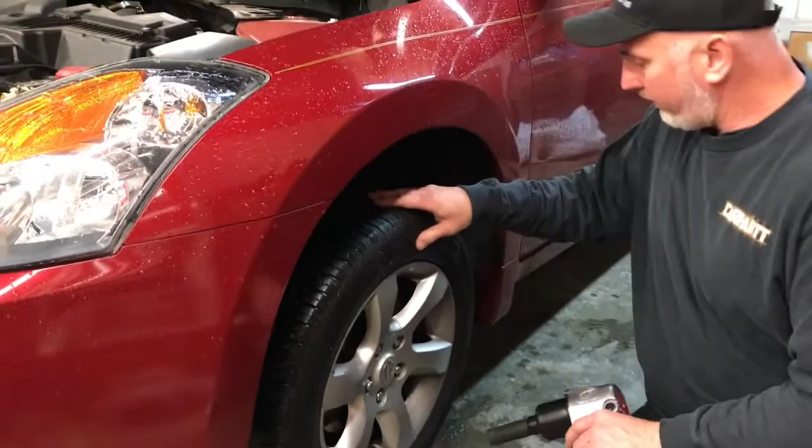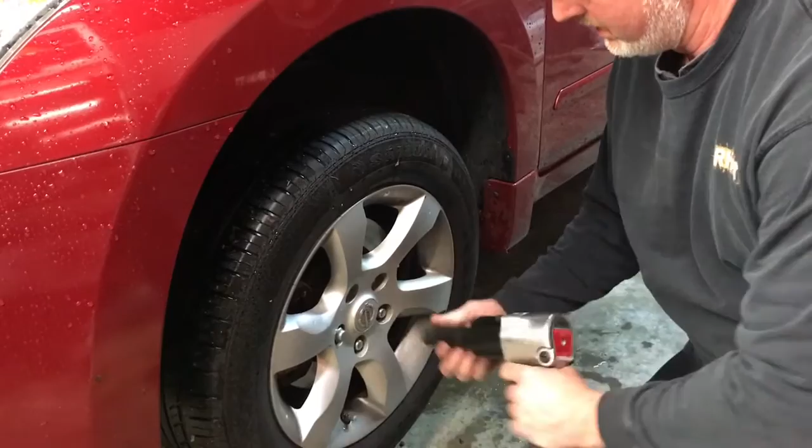I'm going to use my 1/2-inch drive impact wrench, and we're going to pull all of the wheels off. Okay friends, now we've already got all the lug nuts off of the vehicle.

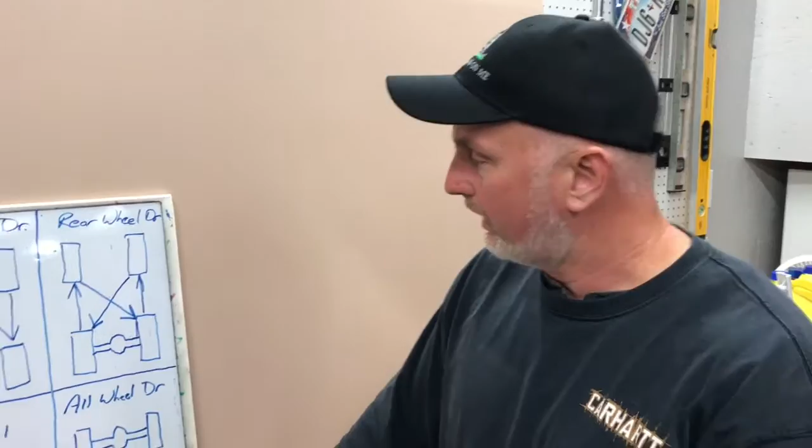I want to talk about how to rotate the tires, because there's a couple different patterns depending on what kind of vehicle you have, and hopefully my little diagram here will explain it to you. Now back in the old days, when I first got in this business, we were always taught that you always rotated tires from front to rear no matter what.

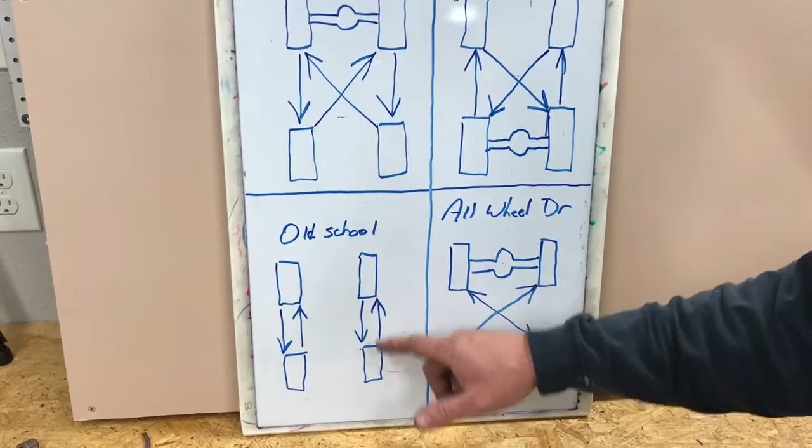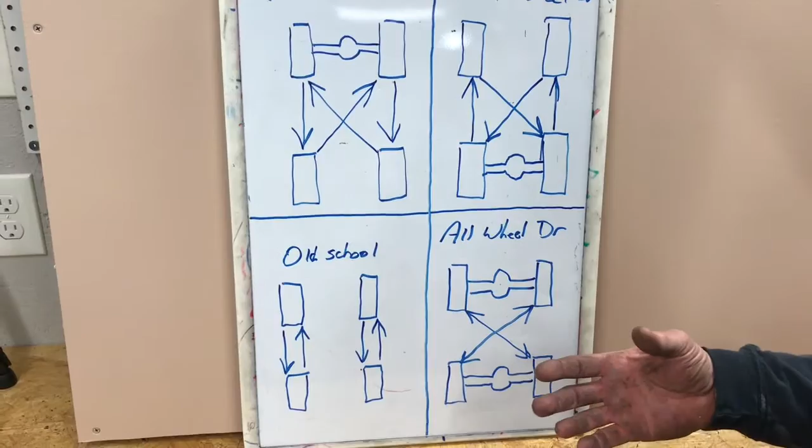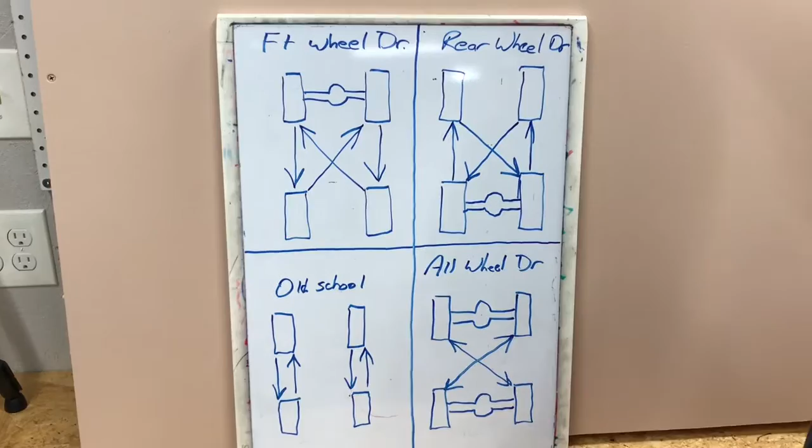If you crossed a radial tire, what we were told back then was that it would actually cause a tire separation and make it fail. That's no longer true these days. Tire technology has come a long way and has been for quite some time. So there's actually a couple different choices here depending on what kind of car you have.

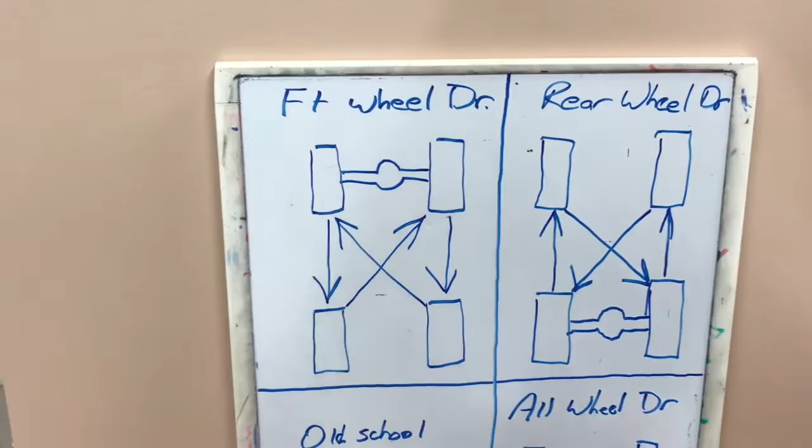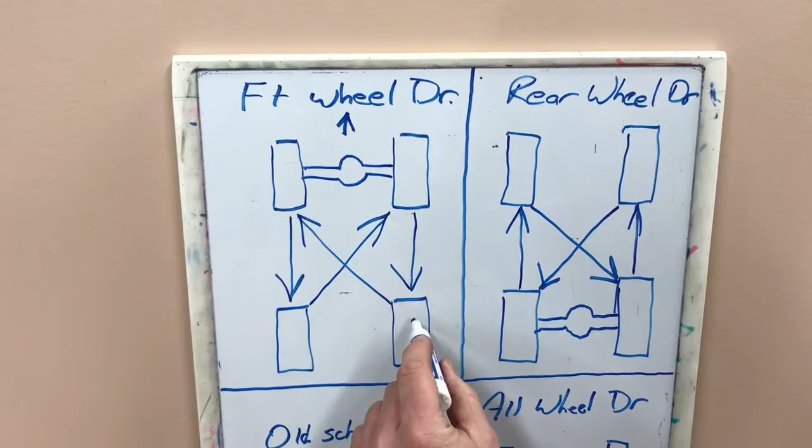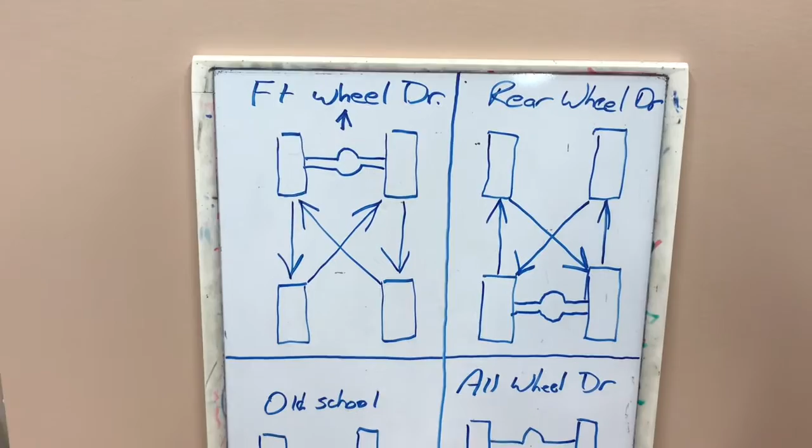Now if you have a front wheel drive car like we have today, this being the front of the car, I'll just put an arrow here. We've got front wheel drive, so we're going to move the driving tires straight to the back on both sides, and we're going to take the rear tires and cross them to the front. That's going to help eliminate any irregular tire wear patterns and keep cupping down to a minimum. So this is what we'll actually do on this car today.

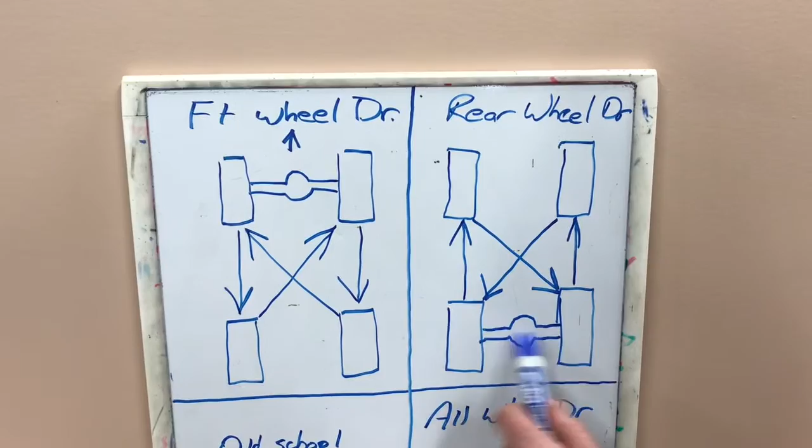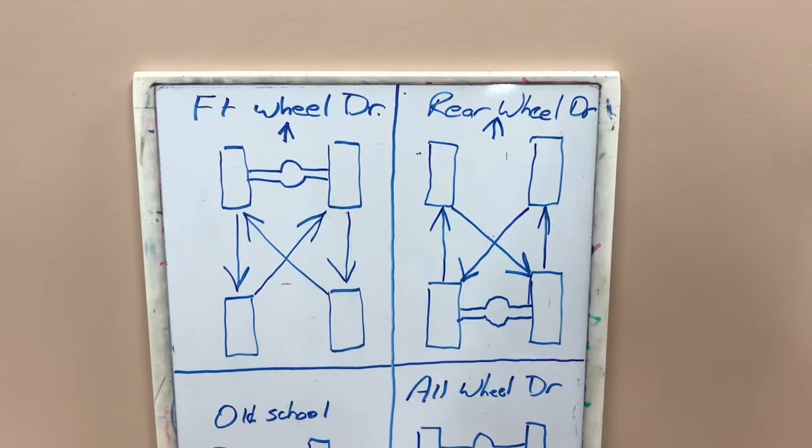Now if you had a rear wheel drive car, like a truck, where the axle is in back, this being the front of the vehicle, you would actually move them to the front and take the front tires and cross them to the back. Once again, that's to prevent irregular tire wear patterns. You'll get a little bit better job out of your tire rotation to keep your tires having tread as long as possible.

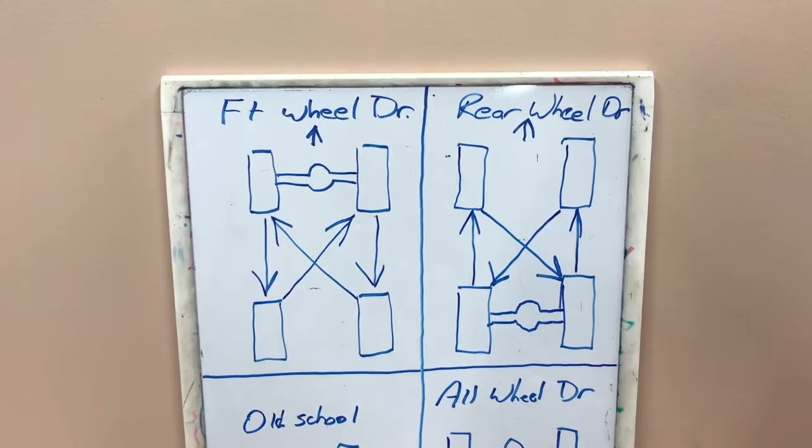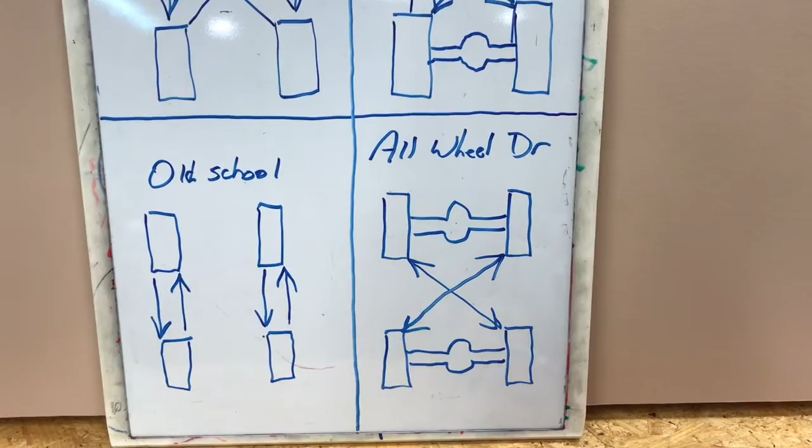Now let's move on to the final one. If you have an all-wheel drive or four-wheel drive vehicle, you can X the tires. That's usually the best thing to do with a four-wheel drive. I remember back when I was working at Infiniti, we noticed that the QX4s were getting cupping problems on vehicles with less than 10,000 miles. So during our scheduled service, we would go ahead and cross-rotate the tires on all of those, and it helped the customer's tires live a little bit longer.

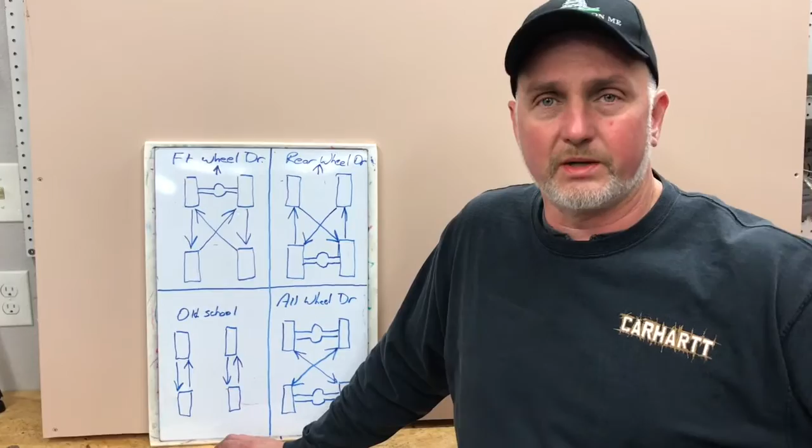And so friends, that's basically it. Like I said, we're going to go ahead and get started. We're going to go ahead and move these tires using the front wheel drive pattern, and let's get it done.

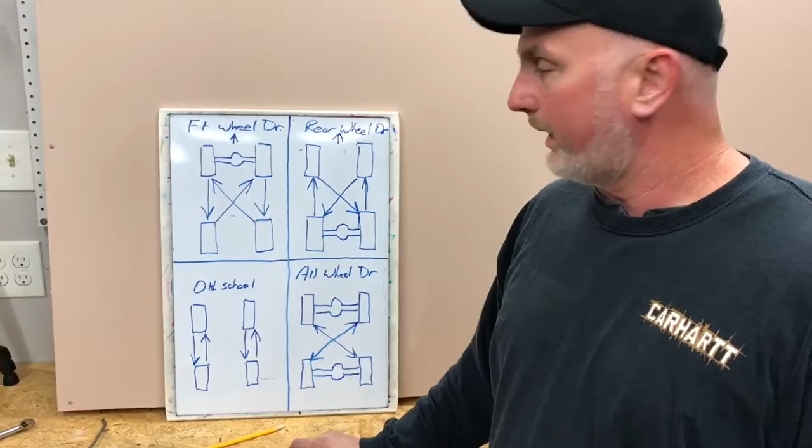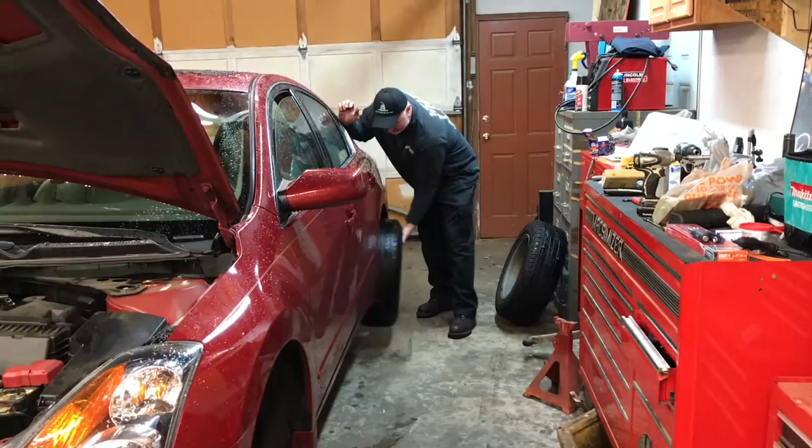All right, friends, we're here on the left front. We're going to take this left front tire and roll it back here to the back. It's going to end up going on the left rear. We'll take our left rear tire and roll it around to the right front. We'll sit it right here for a moment.

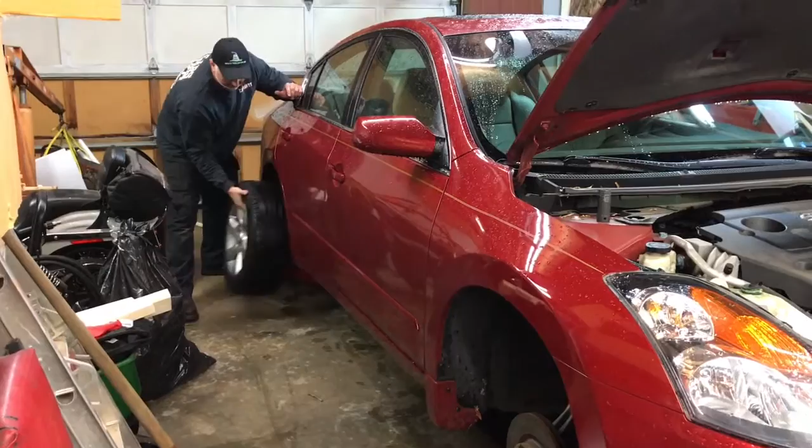Now we'll take our right front tire and move it straight back here. We'll find something here to lean it on. We'll grab our right rear tire and we're going to move it around to the left front.

Okay folks, we're going to go ahead and put all these tires back on the car one by one. We'll start here with the left front, and we will start all of the lug nuts by hand. Then we'll show you how to properly torque them down.

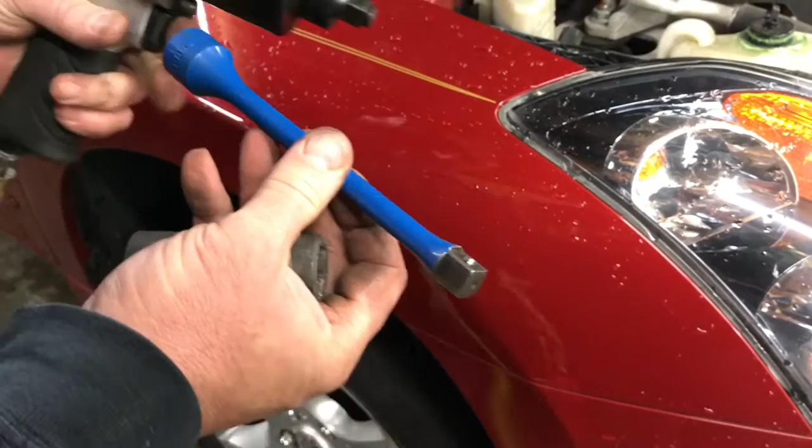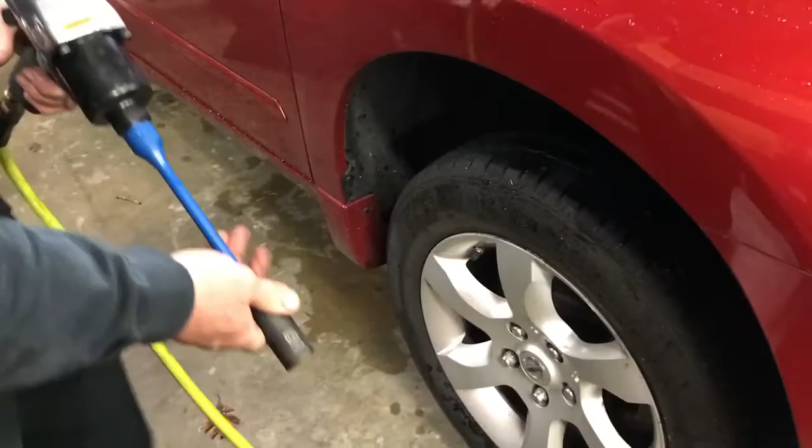Okay friends, what I'm going to use to tighten this back up with is our impact wrench along with a torque stick. This torque stick is rated not to torque anything over 80 foot-pounds. So we'll go ahead and stick our socket in place, stick this on our impact wrench, go down here on the car, and we will tighten these down.

Okay, so we're going to go around to each tire and zip them down that way, and then we'll lower this thing down and use the torque wrench to put the final torque on this car.

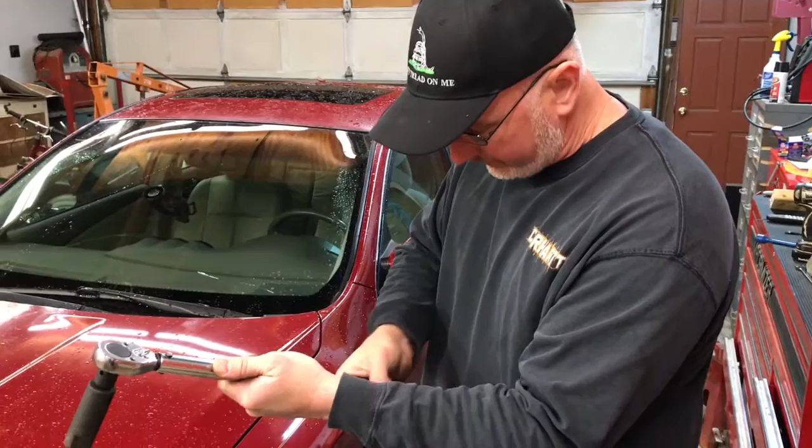Okay friends, one final thing to do is we're going to take our torque wrench and go around and check the lug nuts on all four of these tires. The spec on this particular car is 80 foot-pounds. So we're going to go ahead and go around with a click-type torque wrench and check all of them. We'll go in a star pattern.

Go around and check it one more time, and then we'll move on to the next wheel.